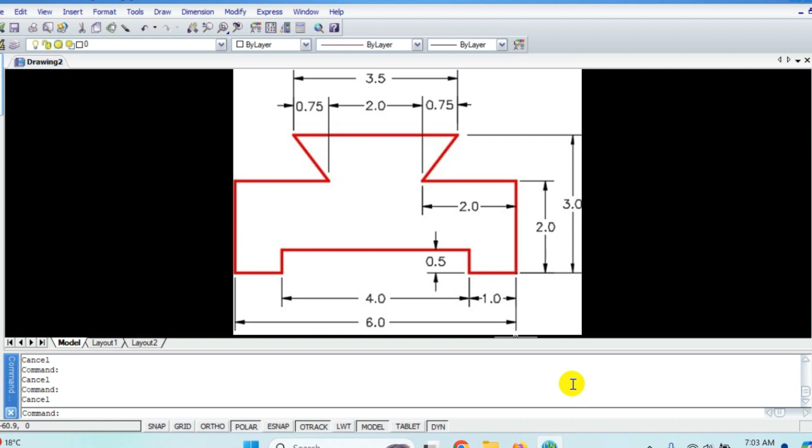Now let's do more practice on the line command. This is the diagram I want to draw. I'll show you this diagram using the absolute method and then the relative method. We can draw it with polar too, but the angle values are missing, so I'll take a different example for the polar method. I'll draw the same diagram with absolute and relative methods. Try to understand how I'm calculating the coordinates.

First, I have to set the limits. As the diagram has length 6 and height 3, I'll take the lower left corner as 0,0 and the upper right corner as 10 in the x direction, and you can take 10 in the y direction too, no issues. After setting the limits, Z enter, E enter.

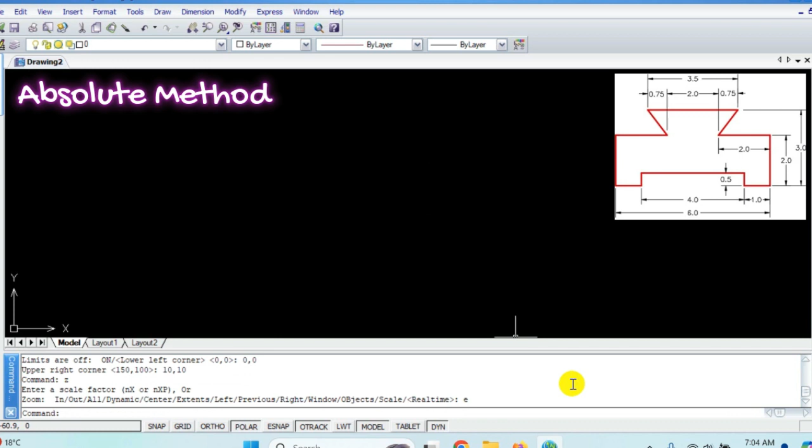Now I'll go for the line command. Press L enter or type line enter. Now it is asking me the start of the line, so I put 0,0 origin as the start of the diagram. After that it asks for the next point. Since I'm drawing with the absolute method, the next coordinates will be 1 in the x direction movement and 0 in y direction movement. So coordinates will be 1,0.

After that, the value of the coordinate is 1 in x-axis and 0.5 in y-axis. After that, the next point coordinates are 5 in x-axis and 0.5 in y-axis. After that it is 5 in x-axis and 0 in y-axis, and the next one is 6 in x-axis, 0 in y-axis.

After that it is 6 in x-axis, 2 in y-axis. Then it must be 6 minus 2, which is 4, so 4 in x-axis and 2 in y-axis as per the dimension. Now the next coordinates: 6 is the total length, if I subtract 6 minus 2, that's 4, and add 0.75, so it's 4.75.

So the value of x is 4.75 and value of y is 3 for this point. This is the required point. Now the total length is 2 minus 0.75, that is 1.25. So the coordinates will be: in x direction it is 1.25, and in y direction it is 3.

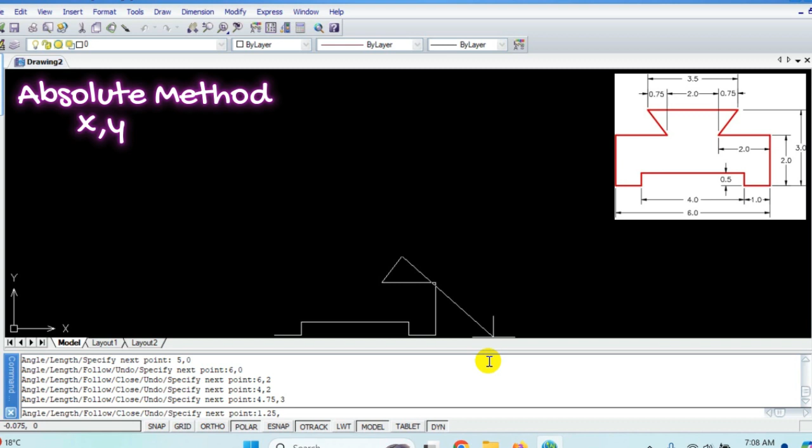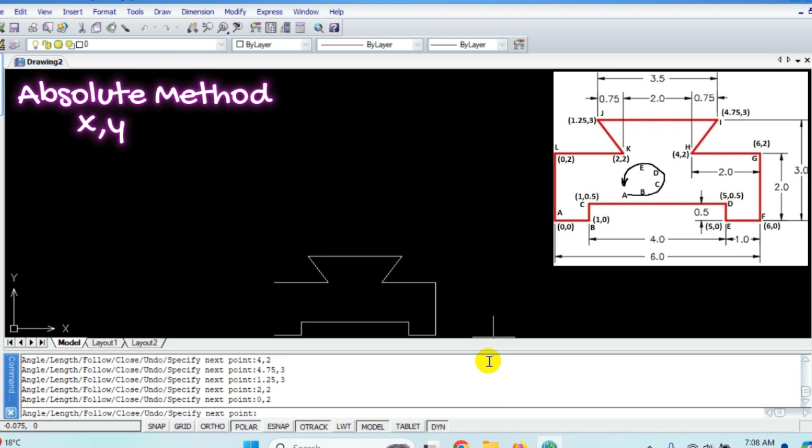Now after that the coordinates will be 2, 2 - the exact coordinate, because this is the absolute method, so I have to give the exact coordinates with respect to origin. Now after that, the value of x is 0 and value of y is 2, and in the last it is 0,0. So this is the diagram. Still it is in the line command, so you have to press escape to come out of it. Now I can zoom this, Z enter, E enter. This is the diagram we have drawn with the absolute method, giving absolute coordinates.

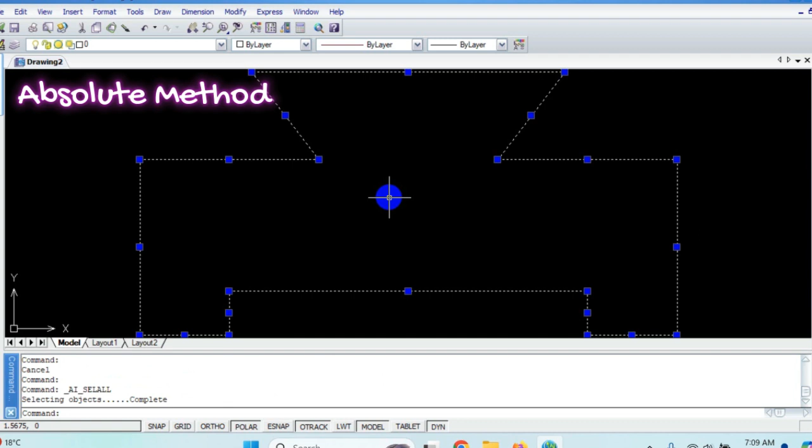Now we will draw the same diagram with the relative method. I will select all and delete this. Everything is erased. Now I'll go for the relative method. First I have to set the limits, setting them 0,0 as the lower left corner as per the diagram. You can take any value bigger than the dimensions, maximum length, maximum width. Z enter, E enter. Now my command will be the line command.

Now see, I have to draw this diagram using the relative method. Relative tells me, with respect to the previous point, how much movement we have made. Consider the previous point as origin, then calculate. So let's see, now I'm giving the line command, L enter. Now it is asking me the start of line, that is origin 0,0. Now how will I tell the compiler that I'm using the relative method? By putting @x,y. So the syntax is @x,y.

Now I will calculate the values with respect to the previous point, how much I am moving. So consider the previous point as origin 0,0 to make the calculations easy. So the last point I have taken as 0,0. How much do I want to move with respect to this 0,0? It is one movement in the x direction, 0 movement in the y direction, so the compiler comes to know, with @x,y, that it is the relative coordinates, not exact coordinates.

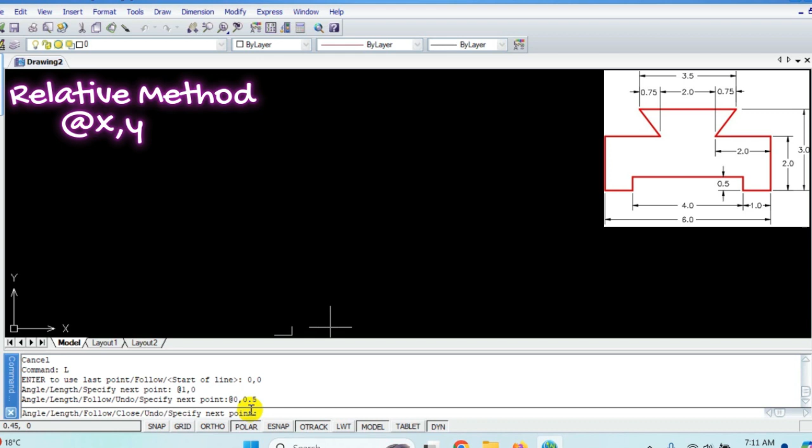Now the next point is, after drawing the first part, how much I want to move in x direction at the rate 0, and how much in y direction at the rate 0.5, at the rate x comma y. So this is done. Now same, at the rate how much I want to move in x direction 4, in y direction 0. After that, now my movement should be downward, so x direction at the rate 0, and y direction at the rate minus 0.5, because I want to move downward. So downward will be minus, upward positive, similarly right side positive, left side negative.

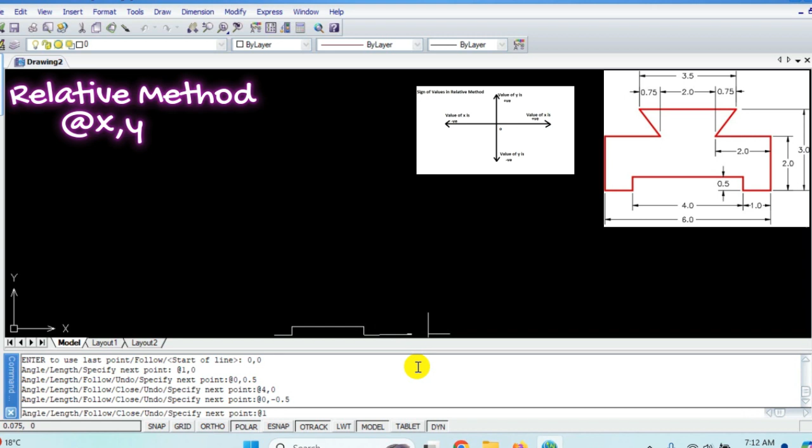Now after that I want to move 1 unit on the right side, so at the rate 1 comma 0, 0 movement in y direction. The compiler will remain in the same line command until you change the command by pressing escape and giving the line command again. Now the x direction movement is minus 2 and y direction movement is 0. Now the x direction movement is 0.75 and y direction movement is 1.

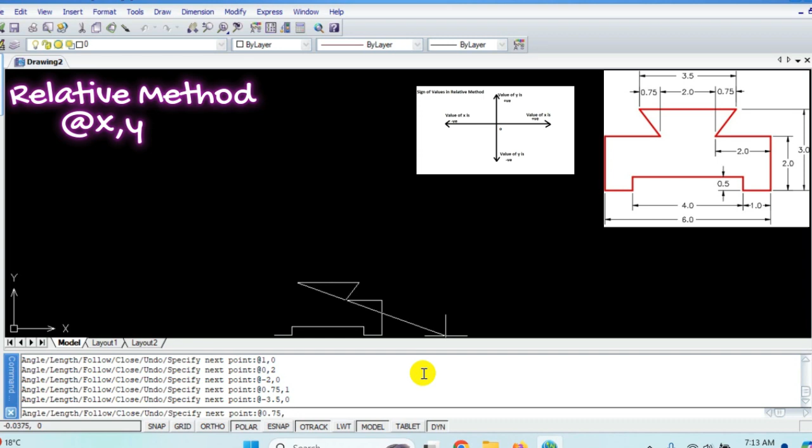After this, now the next is 3.5 on the left side, so the x direction movement is minus 3.5, y direction movement is 0 with respect to the previous point. Remember this is the relative method. After reaching this point, now my x direction movement will be positive 0.75 and y direction movement will be downward, so minus 1. After that, my x direction movement is minus 2 because it is going to the left side, y direction movement is 0. Now after this, my x direction movement will be 0 and y direction movement with respect to the previous point will be minus 2.

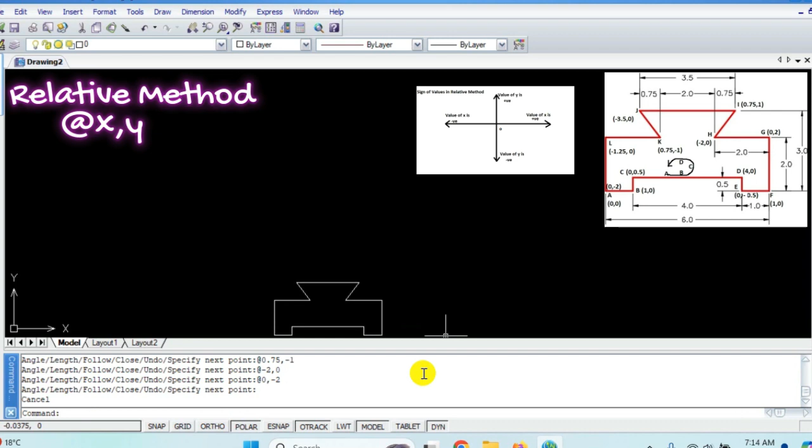Now I'm going to zoom this, escape, then Z enter, E enter. See, this is the diagram - the same diagram I have drawn with the relative method. Next I will draw a different diagram with the polar method. In the main diagram you can mix the methods, like polar, absolute or relative, but using a single command particularly, I have drawn this diagram. Thank you.